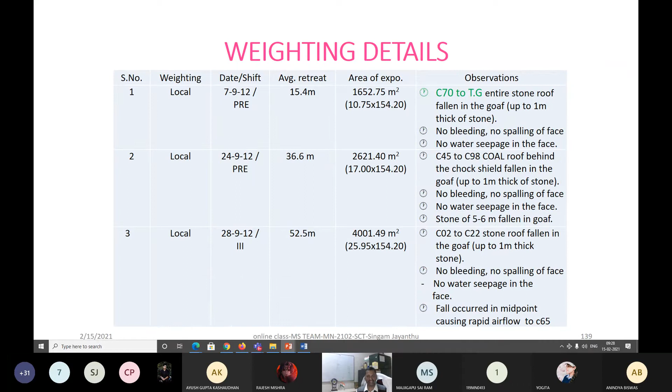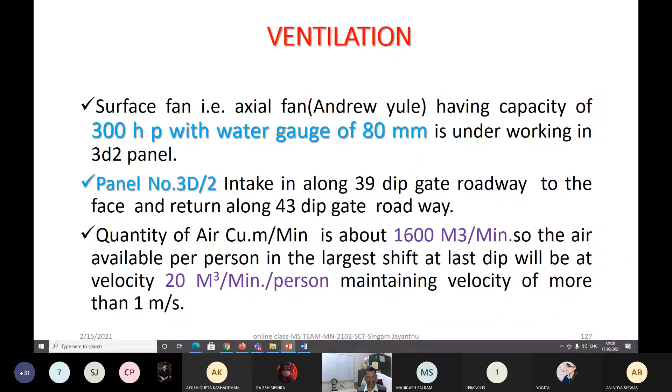And these materials, let me show you once, so that anybody interested, we can discuss more. Now, this machinery and whatever was used, we discussed at that time. Now you see, machinery at work, because why I am telling this is, as a part of your syllabus or course, you are supposed to know about the equipment. What are the equipments being used at the working faces? As you are seeing here, at that time I could not explain because of these problems of audio and other things. So AM50 road headers, that is for driving the gate roads.

That gate road drivage can be done many ways. If it is a conventional way of driving, you may be blasting and then loading with your SDLs, LHDs, or even with the scrapers. Long back we even did manual mining also. But nowadays, whatever drivage we do, we are utilizing either continuous miners or road headers, so that when you are not blasting, that gives very good conditions of strata.

That means with blasting, the rock mass surrounding your gate road or opening, gallery, whatever name you give, is getting disturbed. That is the reason why we use cutting machines, and with cutting, as mechanical engineers know very well, this damage to the roof or sides will be very less.

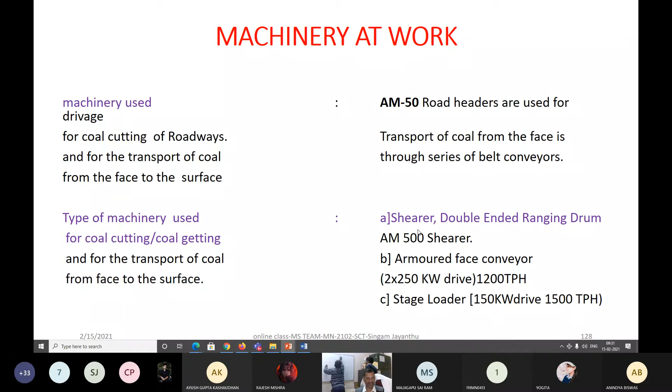And then the armoured face conveyor, you know very well, we have seen in the lab model, as well as some videography and photographs of my own investigations in the mines. The specifications, of course, you will get in a lot of books, so I will not go further, but I am going back to show some important points which were missed, so that you understand.

And here, support on the face: we have written 4 by 750. The meaning of this 4 by 750 is that the total capacity of the support is 750 tons, and 4 implies there are 4 legs. Nowadays there are 2 legs. 2-leg supports also have their own advantages and disadvantages.

It is something like we people with 2 legs walking nicely, beautifully, like your Amitabh Bachchan, Shah Rukh Khan. And similarly, with 4 legs, this has more stability and so many things, like our beautiful animals.

You can name anything. Monkey is one of them. Okay, like we all behave sometimes when we are not submitting our assignments in time. That behaviour is monkey behaviour only.

But we all come above that level, whether it is a 2 leg or 4 leg. It's a 2 leg, like my beloved students who are highly intelligent, punctual, disciplined, and part of Skill India, Atmanirbhar Bharat, like you people. They are also very good. At the same time, 4 leg like animals, right? They are also very good in a different sense, right? So these are the supports, that terminology when we use, whether it is a 4 leg or 2 leg.

Shall I take attendance now? Yogita madam, is it required? Yes, sir. Shall I take attendance? You are not little kids. Okay, sir. You are all responsible people. Okay, don't worry. My point is, I was told by some of our beloved students that some students, not you people, simply keep their mobile on and they are sleeping, right? So at least I want to make them awake in between, so that they will become a part of your Skill India, Make India, whatever it is. Okay, don't worry for that.

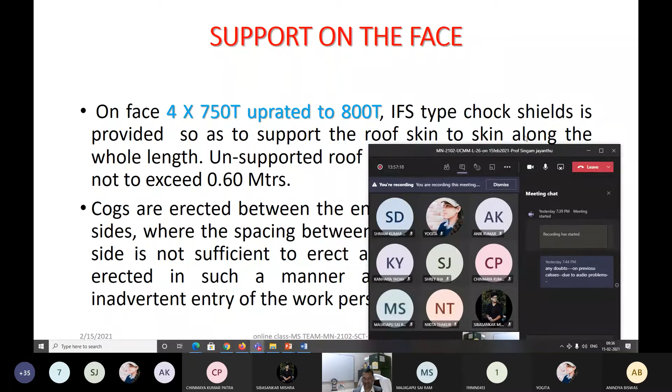Now, uprated to 800 tons means, whatever supports are there, by any manufacturer, they have a facility when they design, even your computer or your TV, whatever you are utilizing, right? So if it can sustain 220 volts, it has a capacity for 220 plus or minus 10%, 5%, so many things are there. So that type of facility is generally provided by the manufacturers, and that's the meaning of this. And then this can be operated, that's what was done, and that's what I was trying to show you. And other things you already understood, long wall driven with 7 meter wide, right?

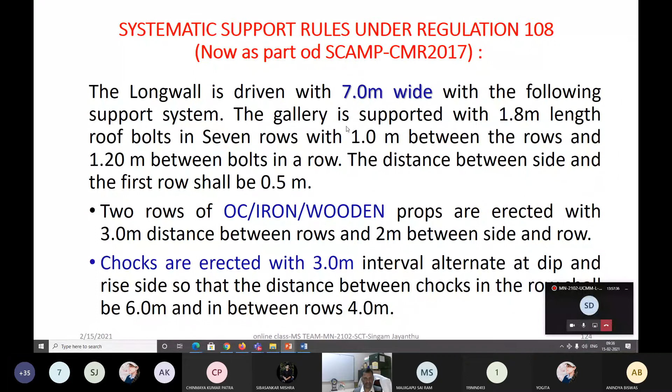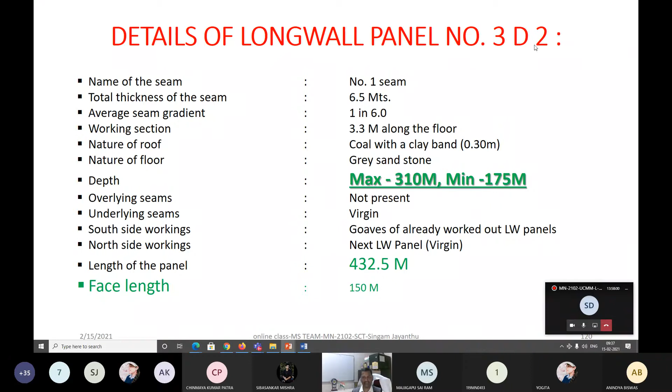So here itself I should ask you so many questions, and here also I kept 4 by 800 tons chock shields at that time, 3D2 panel, which we monitored. This is CDF France in 1989-90; the CDF France was in East Katras, but this long wall panel 3D2 is in Adriyala, adjacent to the GDK 10 incline mine. Okay, so these things we already discussed, and let me not go that much back, only depending on your doubts we will go to that. Only thing is at that time I could not explain.

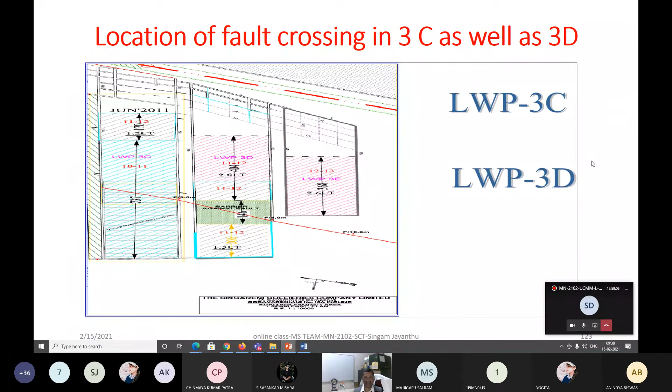Now you see these are the long wall panels, and in between there is a fault plane. Now you should understand very well. If there is a fault, we face a lot of problems, and that is why many attempts were made to cross the fault in the previous panels, and I should say we failed to do it properly, right? So in the subsequent panels, we kept this as a barrier between two panels. That's why the 3D panel was made into 3D1 and 3D2, two sub panels. That is the meaning of this. Those practical issues I wish you should understand. That's why I have shown you.

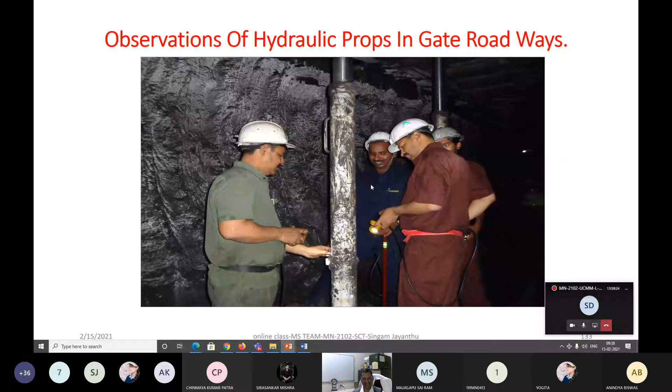And these are the people, our Sridhar in that same long wall panel when we were doing investigations or designing aspects of it. And he is our Narendra, now he is a director of mine safety, right? At that time he was assistant manager, and we were doing all these investigations.

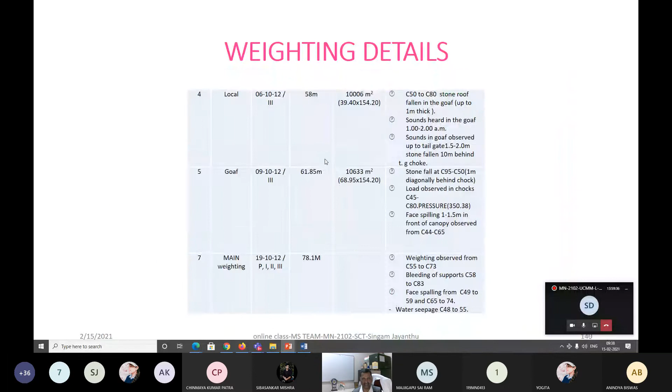He is a strata control engineer, Sridhar, right? All those people are there. Whenever you go to that mine, you will be seeing them, you will be visiting all those people.

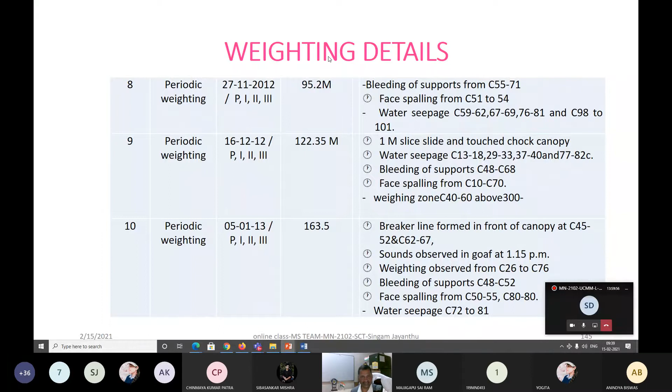Right. Now, continuing with that, just to say a few words, giving you just 5 minutes, let me tell you that you have already seen whenever there is a longwall panel. While explaining this, let me make you aware of this. I was trying to show you now.

Let me utilize this board also, if that board is clear to you. I am coming out of this sharing. Now I stopped sharing the screen. Now you try to see whether this board is visible. Then we go further with the longwall mining. Let me also know.

I would like to use very big letters. Longwall mining. Are you able to see this? I have written longwall mining on this side because I was told this side is more clear compared to this. Some glare is there. Is it okay? Yes, no? Yes, sir. Very good.

So in longwall mining, what is happening? So this is a floor, right? Suppose this is your 3 meter or 4 meter, whatever is the thickness of the seam. Then you consider this side as your barrier; you started extracting from this side, and you are moving on to this side. Now this is your barrier. Once you are extracting, suppose now you are at this stage.

Why I am telling this is, you should understand clearly when I am showing you the behavior or the status of that longwall panel, as far as your face performance or your gate road performance or, on the whole, safety status or its ventilation, all those aspects we are trying to understand here.

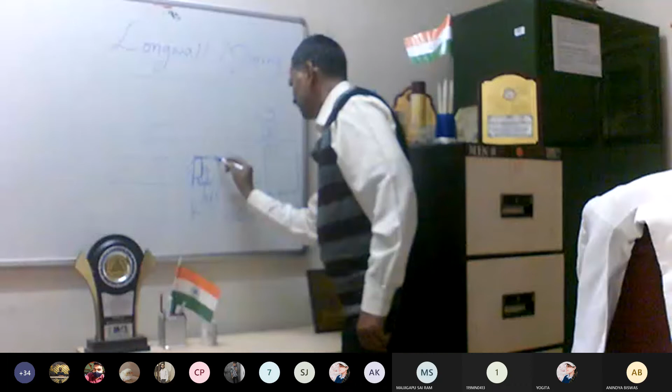At that time, your chock shield supports with a canopy, whether 4-legged or 2-legged. Just for understanding, your shield support has a lemniscate joint. We call it a lemniscate joint because whenever any leg is moving, the top canopy should stay horizontal. It should not go something like this.

Whenever you are extending the legs of the chock shield supports, the canopy, the top plate, which has 1.5 meter width and a length of around 4 or 4.5 meters, stays horizontal. And then this will become the goaf.

When the face advance is around 50, 60 meters, by that time there are conditions for total caving of this goaf, and that is what is called the main fall, main weighting, or major fall. When this is happening, maximum load will come on the chock shields. That's why while designing the support system, you are supposed to provide that much capacity in the supports to take care of this, and there will be a lot of dynamic loading at that time, right?

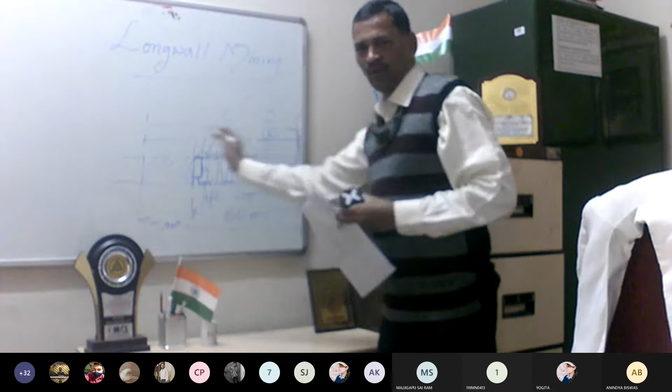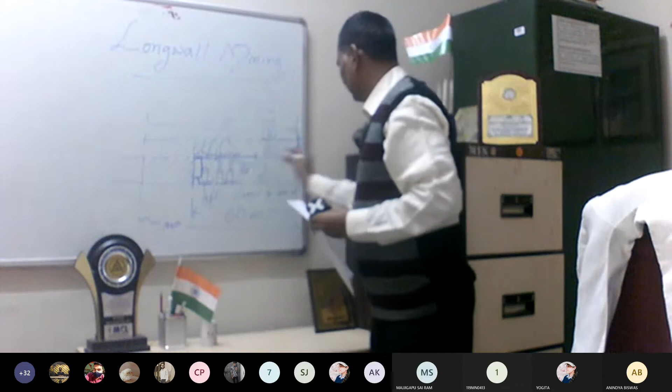There is no connection here from here to this place. Before the major fall, this had a connectivity of all these layers, whatever is the overlying or nether roof. Here it is like a total plate of your face length, 150, 200, 250, 300 meters, whatever it is, and then this 60 meter length, 60 by 200 meters. So that much area, 60 by 200, is around 12,000 square meters exposed, and that plate, whatever is this 60 into 250 or 200 meters, is sufficient to cause the total major fall.

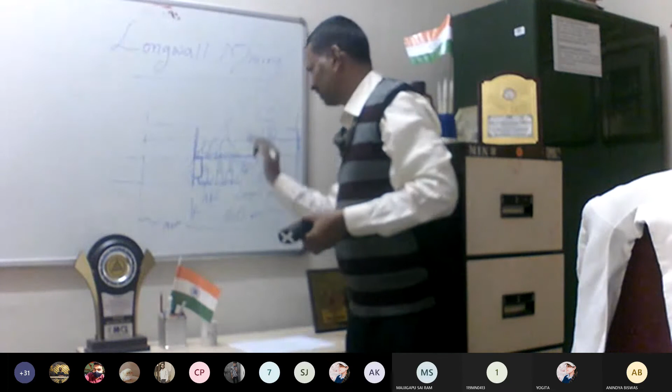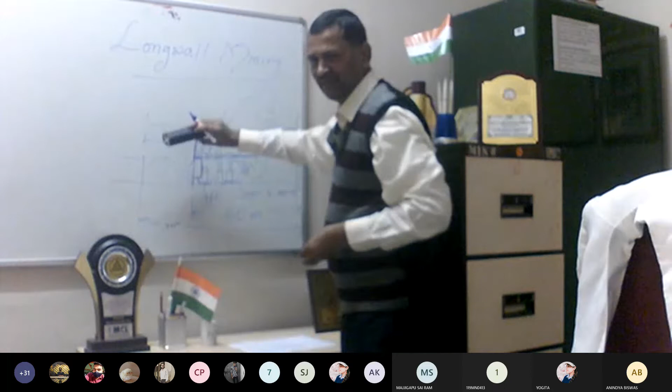And after this fall, what happens? Now here there is a break in the connectivity of this roof, whatever is there, with the barriers. Now this will act as a cantilever, and that is the meaning of what we are writing here as periodic weighting. If you consider this total plate as a beam in a two-dimensional case, this beam is now not a fixed beam on both ends, but it is open on one side. So now it is acting like a cantilever beam, and this cantilever is being supported by your chock shield supports.

So this is how it comes every time, around 15 to 20 meters. That is our range in Indian coal measure strata, and this is the periodic weighting. Now you can use the word periodic weighting, and this is the main weighting or main fall. These are the differences that people should understand. Periodic weighting and main fall are different situations. At the time of the main fall, a lot of load will be coming, because there is a large span, and it can be dynamic loading.

So your support, because your persons are working under it, should have the capacity to take that, and not only the capacity, it should have yielding characteristics also. When there is a dynamic load, you should allow it to yield. Just imagine a case when load is coming but the support is not yielding in compatibility with the ground reaction or ground behavior. When your support behavior is not compatible, that leads to chocks going solid or failure of the chock legs, and all the chock legs will be broken. In a very simple way, this load is coming, and if my chock is not going down at the same rate, the roof is coming down very fast and it is not yielding.

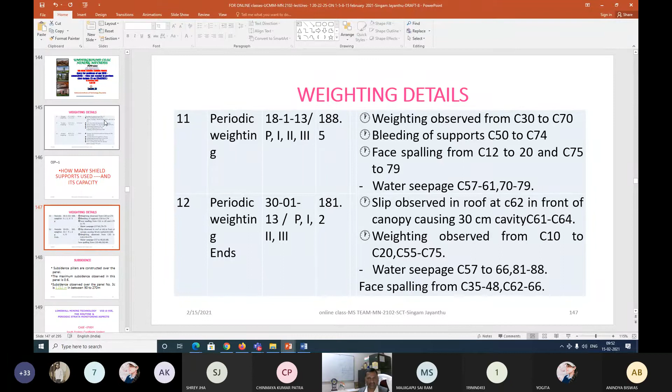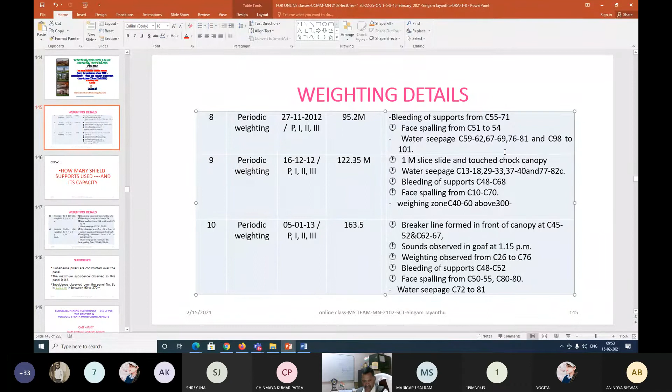You are cutting with your shearer. The shearer is moving from here to here, right? So at a time you are cutting about 0.8 meter or 0.6 meter thickness, or the web thickness, whatever is the thickness of your drum, you are cutting it and then moving like this, okay?

But while cutting it, depending on the load coming on that, that is the reason why you should know all the geomining conditions - what is the depth cover? If there is more depth cover, then you will be facing a lot of problems of spalling. You are cutting it, but at the same time there will be spalling, and if the spalling is too much, it may help you cut easily, but it may cause more problems of yielding and uncontrolled face or strata control problems.

Okay, now water seepage, whatever is mentioned here, happened from here. Then the same thing, periodic weighting happened again at 122 meters. Now you can see about 20-25 meters is the span required. So that is the meaning of this - it requires a cantilever of around 20-25 meters for the next periodic weighting to take place.

So next time when you are monitoring all these things, you will understand that when that periodic weighting comes, you should be very cautious in your production, and you should be very fast in the rate of extraction. All those things are supposed to be taken care of.

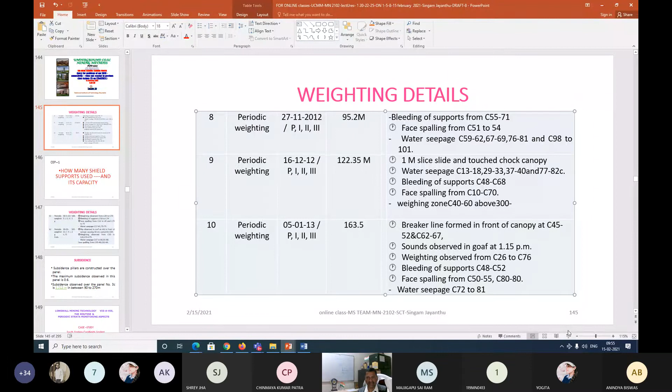So now you can see one more thing here, face spalling from C10 to C70, and bleeding of support C48 to C68. You can just imagine that you are there in the face and there are this many number of supports, you are moving around and working the long wall face. So this is what is happening.

Now you can see the weighting zone, also how much is the weighting zone, and breaker line formed in front of the canopy. This is a very important issue, my beloved students. This causes a lot of problems, because I want to utilize this opportunity to explain through these type of case studies and some practical examples of our longwall mining under progress, right?

While working at the face, let me explain here itself what is happening when you are cutting the face. A breaker line forms from C45 to 52 and 62 to 67. These are the chocks, numbered 1, 2, 3, 4, 5, whatever the number. So almost in the middle there is a breaker line formed in front of the canopy.

What is the canopy? If you consider this as a chock, this is your roof. This chock is there, the chock with your legs, okay? This is your working face, like this. Then what is happening here?

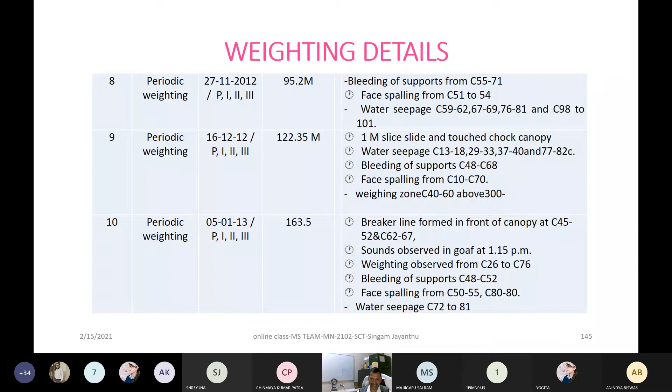When there are these types of cracks or breaker lines forming at the face, between the canopy or the chock and the face, it is uncontrollable, and we have to stop the face for some time. All these things need to be taken care of.

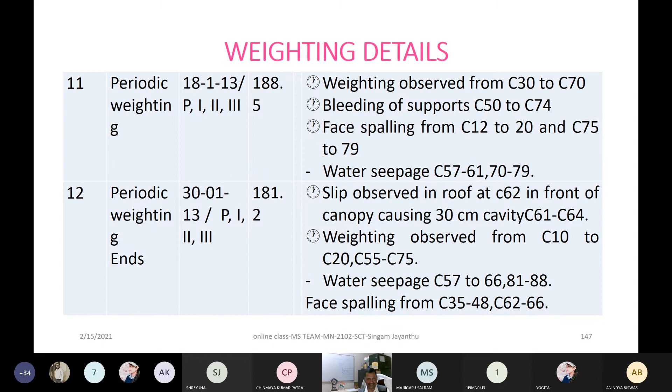So this much should be sufficient as far as the support or its performance is concerned. I am not going into much detail on the other periodic falls and so on.

Now coming to other parts of this excavation or extraction. When you are extracting by caving, in our example panels like 3D1 or 3D2, we have all the data A to Z of these mines as part of our investigations from NIT Rourkela. Even your seniors, whether BTech or MTech projects, used to do this with me.

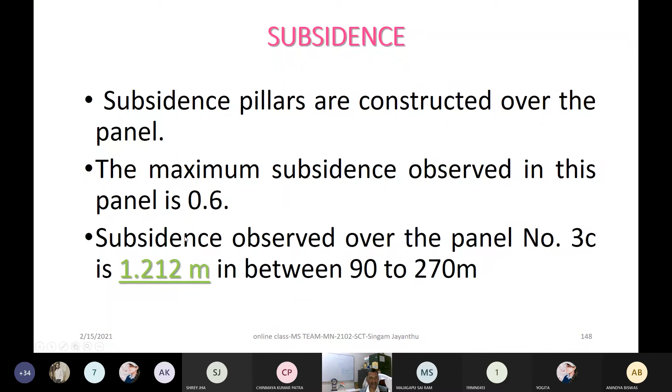There is subsidence, the maximum subsidence in this panel is around 0.6 meters. This was the subsidence observed over the previous panel, which was in 3C. In 3D it was 0.6 meters on the surface, and in 3C it was about 1.21 meters subsidence, because this is a caving process.

Before going to the other panel, let me also check if there are any doubts, and the status of your assignments either through your CR or someone next. All the CRs up to the last one can tell about the status, and if they need any help from my side.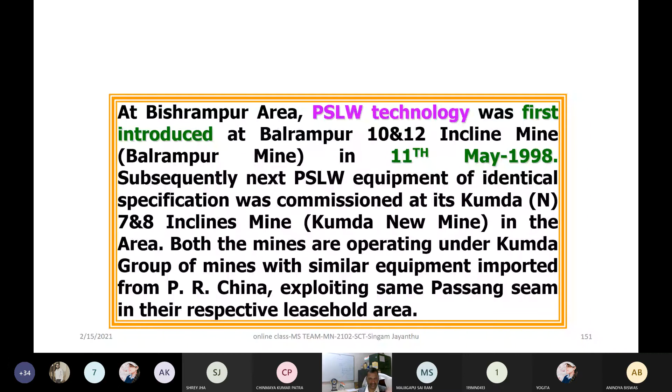After a few minutes, we will continue discussing other aspects of the longwall panels in different mines like the Bishrampur area. I'm just showing this for a few minutes, and before going into that we will discuss the total panel details, what equipment they used, the 8 panels there, the geology, the different targets, and what was their performance.

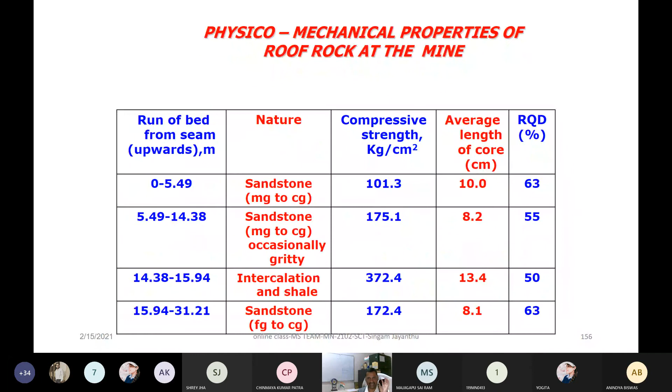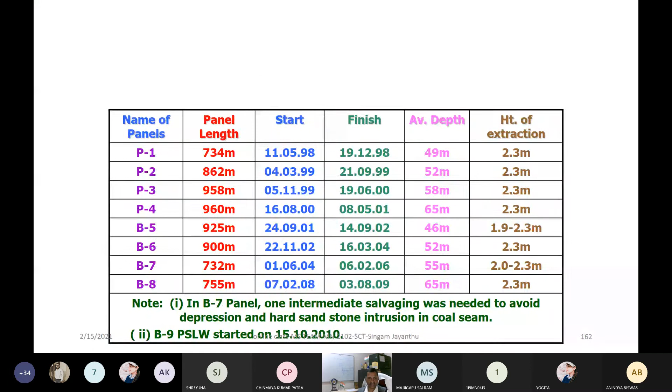We were discussing the geomining situations, overlying rock properties, strength of the rocks, and the machinery, along with any problems faced during long wall mining at these Kumda mines, since we were doing investigations for them as part of pillar design and underground mining method studies.

As part of this, we were also collecting material which may be useful for you. Along with this, what I am showing here is a salvaging operation, which is also very important. So tell me, what do you understand by salvaging?

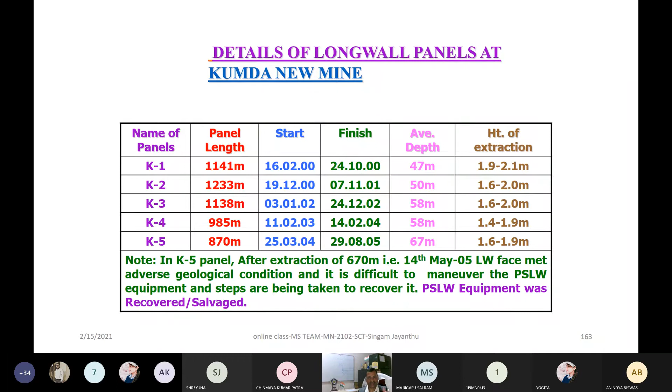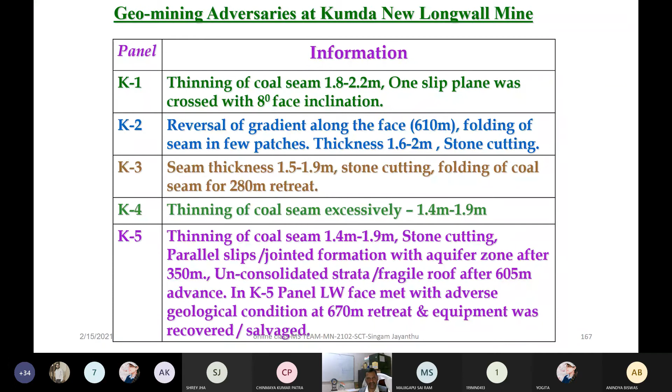We will see all these details in subsequent classes, depending on your performance, before our Saraswati Puja, including long wall equipment and its details. We will also discuss power supports, AFC, shearer, bridge, power pack systems, and all those things in detail.